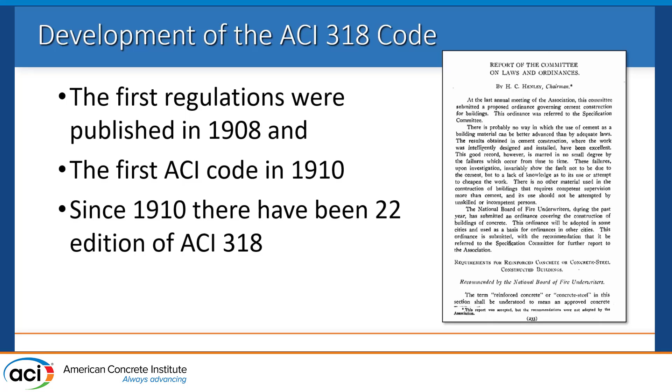It's been frequently revised. We revise the code through a consensus standard process, which is designed to guarantee that minority opinions are heard and considered, and that there's a general consensus. And as a result, I think it's really a very solid, up-to-date document. It continues to be, based on the number of revisions or additions that we've made. The code has updated in intervals anywhere from 3 to 6 years or so. Actually, I think there might be a longer period in there.

But this is all of the editions of the code from 1908 through 2014. And I know this is a little hard to read, so I'm going to read every line here, starting at the top. No, just kidding. These are all 22 editions, but the spacing in terms of intervals is not terribly regular. We see 2 years, then an interval of 10 years, 7 years, 6 years, 5, 6, and so forth. In the current edition, we went from 2014 to 2019, and the next edition will be 2025. So we're looking at a 6-year interval.

Some of this is driven, especially in the last couple of decades, by the overarching building code that references ACI 318, which is the International Building Code. And we had quite a bit of information this morning about codes in the U.S. and how they've developed. But the main point is the ACI 318 code is referenced by a sort of master building code, typically, which is the International Building Code, IBC.

ACI 318 is also referenced by a number of other important regulatory documents in the U.S., including ASCE 7, which is our loads document, ASCE 41, which is our document for seismic evaluation and rehabilitation of buildings, and a number of other documents. So it's a key part of the concrete design landscape in the United States.

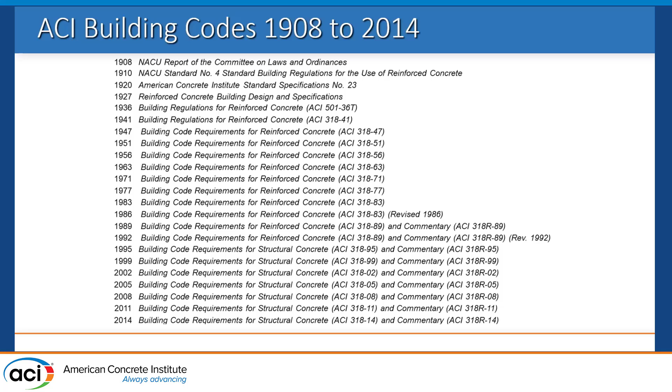So, moving along, what is the current version? I've mentioned it's 318-19, and there's a parenthetical 22 there after it, and the next edition will come out, we believe, in January. It will be published electronically, and then the printed edition will be available a month or two later. It has to go to the printers and get printed and bound and mailed back and everything. You might be wondering, what is that 22 that follows the 19? Does that mean that there was a different edition of the code in 2022?

Not really. In 2022, we made some minor updates to the code just to fix errata, so typographical errors, very small things. We also updated some of the reference standards, the ASTM standards, and other standards that are cited by 318. We brought those up to date, but we didn't make any technical changes. So if you have an edition of the 318-19 code, you can be comfortable in continuing to use it, whether it has that 22 after it or not. The 22 is just a slightly refined version, but the technical content hasn't changed.

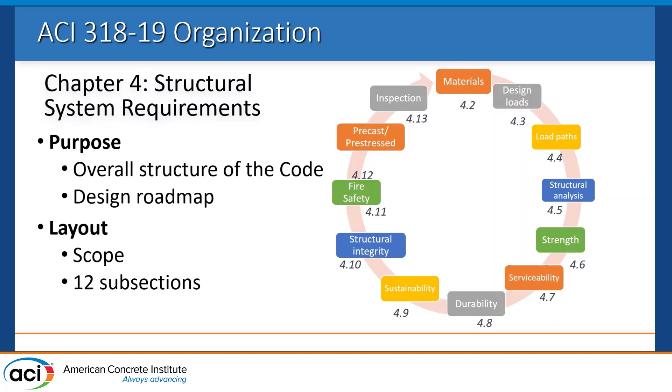For instance, at the top, general information on materials and where to go to find out about cementitious materials and reinforcement and so on, embeds, design loads, where do you go to find design loads, and so on. We get around to sustainability, we get to fire safety, precast, prestressed, and so on. All of those things are described in Chapter 4, and they tell you which other sections of the code you need to look at to comply with the requirements for those topics. So I recommend, if you haven't worked with ACI 318 or are wanting a refresher, that you just spend a little time looking at Chapter 4. It'll get you started in the right direction.

All right, so there are 27 chapters in ACI 318, and if we look at them, we can kind of group them into themes. One of them is general. That's like Chapter 1. It describes the applicability of the code, how you should interpret the code, and so on. It is very general stuff. Systems, that would include Chapter 4 that I just described, looks at overall organization and usage of the code. Members is a very important grouping of chapters. These are chapters that are devoted to design of a specific type of member.

So you will find member chapters such as beams, one-way slabs, two-way slabs. The reason for those chapters, and those are all new, the material in them isn't new, but we brought from 318-11, we reorganized and put everything into what's called a member-based code organization. That was the main thematic update to the code in 2014.

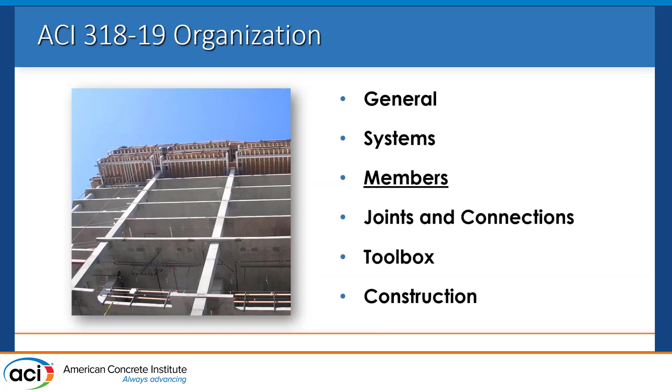All right, so I mentioned the member-based organization of the code, and I want to just briefly touch on that. Here are the member chapters. If you have a particular kind of member that you're designing, a beam or a column or a wall, these are the chapters you go to. So this was, I think, the genius of the reorganization in 318-14: to group everything in the way that the users of the code, engineers, approach design. So we have loads, detailing requirements, analysis requirements, and so on for each type of member in each chapter.

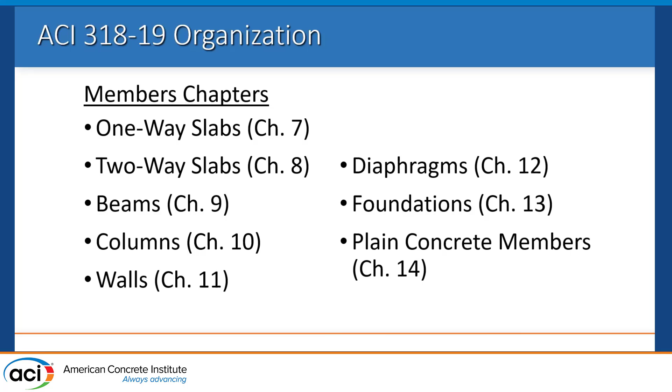So there are a total of 8 member chapters. This doesn't mean you can only design these kinds of members with ACI 318. You can apply the general principles of ACI 318 to designing other types of elements, but these are by far the most common. So let me illustrate why we went through all the work of reorganizing the code in 2014. This is an illustration that shows, for the 2011 edition of ACI 318, all of the provisions required to design this portion of this column. It's a column that intersects with a slab. There's a lap splice there, and there's confining reinforcement. This is a gravity column, obviously, because those ties are quite far apart, rather than a moment frame column.

But if we look at the numbers there, we see references to Chapter 7, Chapter 12, Chapter 11, Chapter 9, and Chapter 10. 5 different chapters and about 7 different areas to look in. So it's kind of a nightmare, really. People who do this day in and day out know, okay, I had to go there, there, and there. But for people new to it, or if you're trying to teach this in a university setting, it really was kind of a mess.

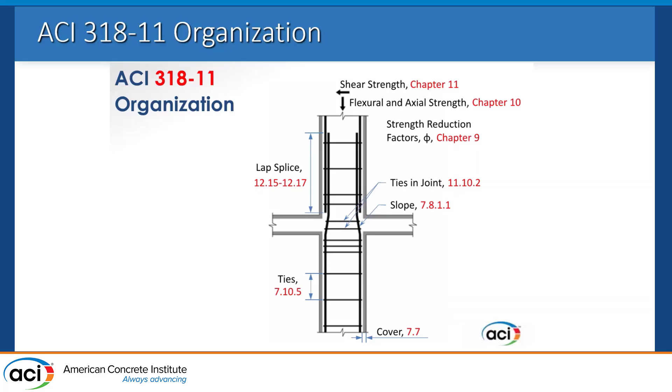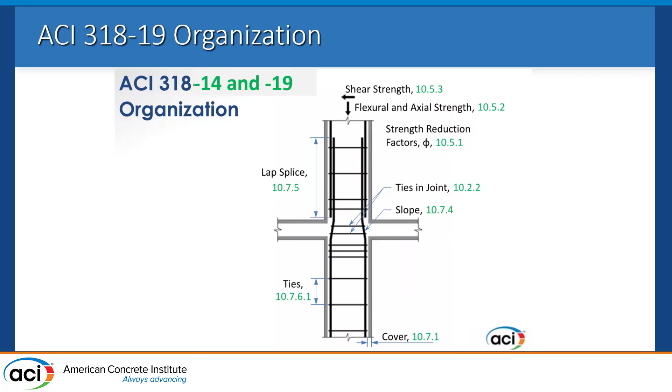So this is what we did. Chapter 10 is the columns chapter. And if you look at all the numbers here, I don't know if you can read them, that green's a little light. These are all subsections of Chapter 10. So when you're designing this column, you follow through Chapter 10 from beginning to end. And if you're satisfied that you have complied with all of those requirements, you have properly designed the column according to ACI 318. So this is what we did in 14 and 19, and this same principle carries through into 25.

All right. One other group of chapters that's very important to the organization of the code is the so-called Toolbox chapters. I'm not going to talk about all of these groupings of subjects because we have an all-day seminar for that if we wanted to spend that much time. I'm just touching on the most important underlying philosophy here. So we have these Toolbox chapters, and that's kind of an interesting designation.

And actually, this is a tool bag, not a toolbox, but we won't get hung up on that. The toolbox chapters, as the name implies, are provisions that you want to consult often as a designer when you're designing multiple kinds of members. For example, Chapter 21 contains all the strength reduction factors. Those are the phi factors for load and resistance factor design.

The phi factors are all in Chapter 21, except for a few having to do with some specialty items. But by and large, they're all in Chapter 21. So if you were designing a beam, you would go find your phi factor in Chapter 21. A slab, you go find your phi factor in Chapter 21. A footing, go look for your phi factors there.

The idea is that if you're designing a member or an element, you go out to that toolbox chapter, rummage around in it, find what you need, and then you come right back to where you were in the members chapter. The same goes for the toolbox chapter called sectional strength, a really fundamental key chapter because it's in that chapter where you're told how to calculate the nominal flexural strength, shear strength, torsional strength, and a couple other things that you can rely on for a member.

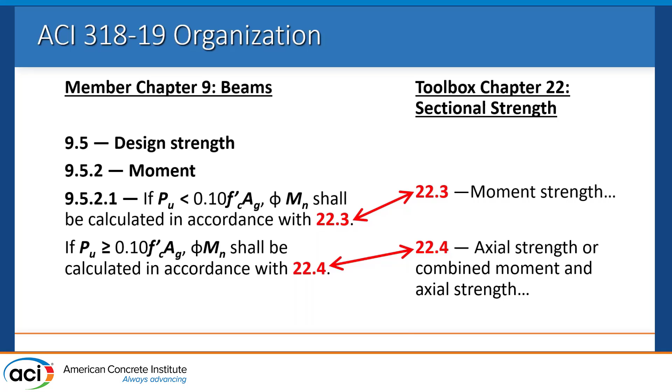Okay, and all of the member chapters have essentially the same organization. That is, this is an example for Chapter 9 beams, but these subsections 9.1 through 9.7 are the same pattern that is followed for every member chapter. So in Chapter 10 on columns, you'll see 10.1 through 10.7, and those topics are addressed in each one. So we're trying to clarify and make more predictable and more understandable the process of designing each type of member.

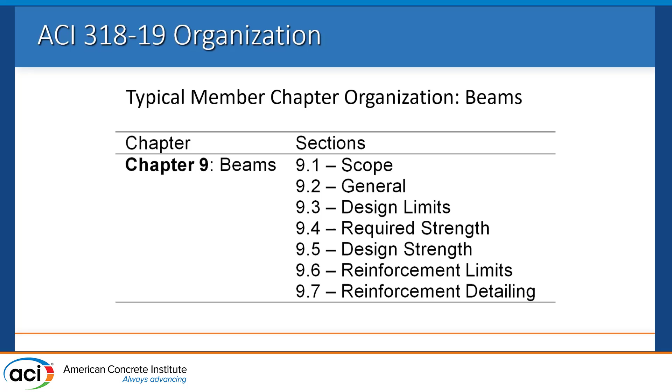Okay, so everything up to this point, I've just been explaining what the 318 code currently is, how we got there, and the underlying philosophy of how it's organized and laid out. Next, part B, is actually just one slide. I'm going to explain where we are with the 2025 edition, at least in terms of the timeline of development and so on, just so you can understand where we are in the process currently.

So very soon after publication of the 2019 code, which was earlier in 2019, we formed the committee for the 2025 edition. I was appointed chair by the Technical Activities Committee of ACI, and then I appointed all of the members of ACI 318. There are, I think, 51 or 52 voting members of the 318 main committee, and then there are 15 subcommittees. And there are some members of 318 who are members only of subcommittees, but not the main committee. And if you count up all the people on the main committee and the subcommittee members, there's about 150 people involved. So it's a big group.

Of course, all 150 of us always agree on everything, so it's very easy to work with 150 engineers.

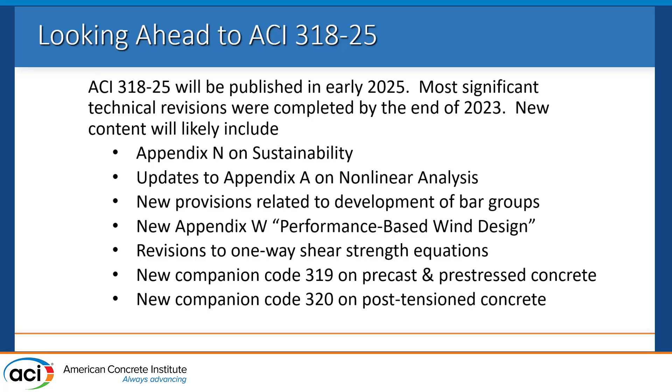as opposed to performance-based seismic design. We'll have significant revisions to the one-way shear strength provisions, and there will be a new companion code, ACI 319, on precast and prestressed concrete, and another companion code, 320, on post-tensioned concrete. Those codes are under completely separate development from ACI 318, organizationally, in that they have the same standing as design codes as 318. However, there's a tremendous amount of coordination and cross-membership between 318, 319, and 320. So those are the main things that are coming, and I just want to briefly talk about each of them.

I don't need to hammer home this point, but we are in a climate crisis, and concrete is getting blamed for a lot of the atmospheric carbon that's produced every year. It is true that somewhere between 6 and 8% of atmospheric carbon is produced related to cement and concrete production. In the U.S., it's actually a much lower percentage, but worldwide it's 6 to 8%. Another statistic I found very interesting is since 1950, so that's 74 years ago, the amount of Portland cement produced in the world has grown by 30 times.

And even since 1990, the amount of cement produced worldwide has grown by 4 times. So we are making a lot more cement than we were 75 years ago, like a lot more. And it's worthy of our attention as structural engineers to figure out what we can do to bring carbon emissions down in our field. We can do our part, and I'll explain a little bit more.

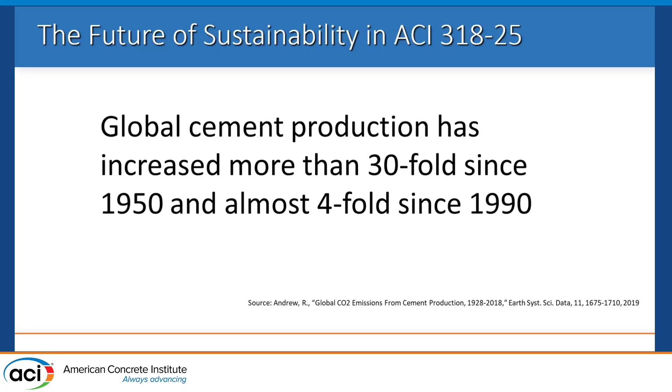This is why in ACI 318-25 we'll have a new optional appendix, Appendix N. It'll probably be called Appendix C or something like that, but for now it's called Appendix N. And the only thing that Appendix N does, I just want to emphasize this, Appendix N does not set limits on global warming potential or life cycle analysis of concrete projects. It only describes how global warming potential and life cycle analysis shall be performed for concrete structures.

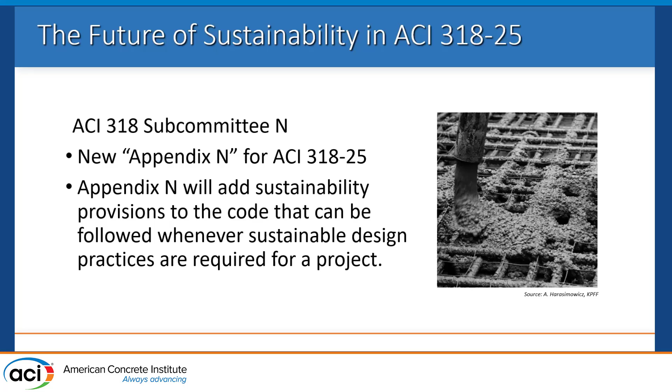And what's the reason for that? We want everybody doing it the same way. If we're going to be comparing projects, comparing materials, it's up to us, ACI, to lay out a level playing field for everyone. Otherwise, if we don't do that, some other entity, organization, government or private, nonprofit or for-profit, is going to describe that, and it won't be very uniform or objective, in my opinion. So we're not setting carbon limits, we're just saying how they should be evaluated.

So Appendix N is actually fairly short. It has a scope section. Then we talk about mixture sustainability measurement metrics. That is basically the global warming potential of a particular mixture. System sustainability measurements, those would be generally sort of life cycle analysis evaluations and how they should be done.

And then resiliency. So resiliency depends on who you ask, but I think most people are of the opinion that resiliency is a part of sustainability, because if you have a more resilient structure, then that structure will need to be replaced less often, and it's also more resilient to disasters or long-term deterioration. So resiliency contributes to a more sustainable built environment.

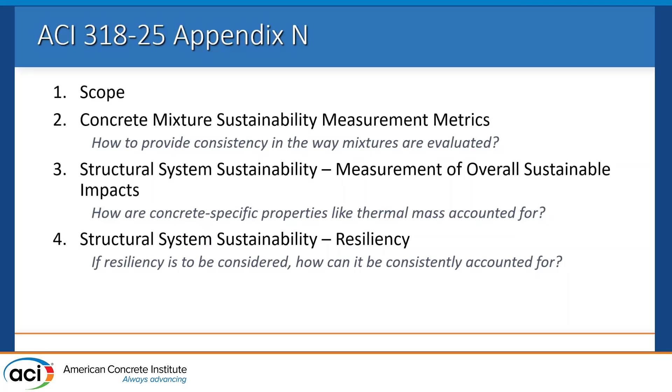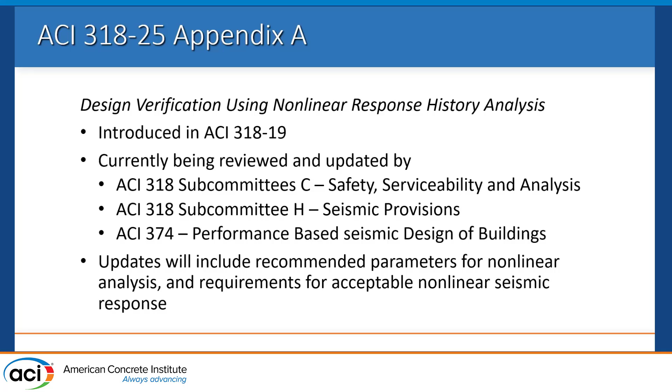So that's Appendix N. Appendix A, as I mentioned, was introduced in 318-19. It's currently being worked on by Subcommittee C, which deals with analysis, safety, serviceability, and analysis, Subcommittee H, which deals with seismic provisions, and then also ACI Technical Committee 374, performance-based seismic design of buildings, is assisting Subcommittee C and H with revising and updating this appendix. And this will provide a little more guidance than we have in the past for evaluation parameters for nonlinear analysis.

A new subcommittee was formed, Sub-R, looking at the relationship between the development, that is the pull-out strength or breakout strength, of a group of bars compared to the development, again, breakout or pull-out of a group of anchors. So we have different provisions in the code for development of reinforcing and for the strength or the development of concrete anchors. And those two things, there's no obvious bridge between those. So this committee has undertaken a look at how those should relate and what's rational.

And it's very useful. They've done some very interesting things with reliability of pull-out and breakout of both anchors and reinforcing bars. So there'll be a few updates to Chapter 17 related to the work of that committee.

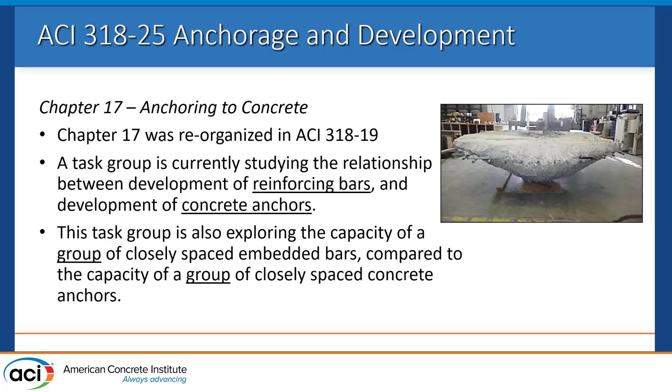Regarding wind, a fairly recent development has been the publication of a pre-standard for performance-based wind design by the American Society of Civil Engineers. I think many of us who work with seismic design are familiar with performance-based seismic design. ASCE is obviously headed towards publishing a formal standard on performance-based wind design. And again, we, ACI, want to make sure that we are filling the need to explain how to do performance-based wind design with concrete structures. If we don't, somebody else will, and we really should be the authority on that.

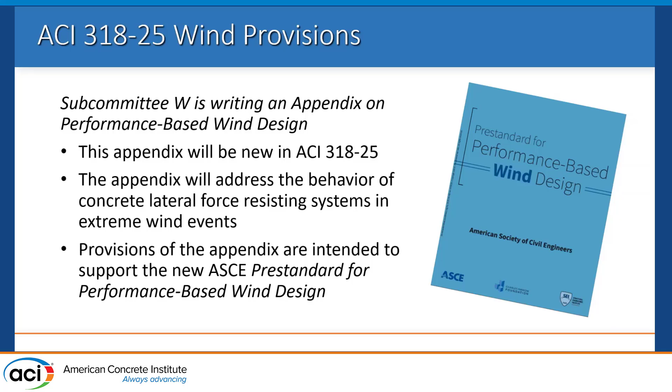So this is in development. I think it's very close to being done, and you'll see that as an appendix. Performance-based wind design generally applies only, currently anyway, to high-rise structures with concrete shear wall cores. But it's a very real thing, and it can save quite a lot of money, particularly in high wind, high seismic areas of the country.

I mentioned that the one-way shear provisions are also changing. What happened was that in 318-19 we made quite a significant revision to the one-way shear capacity equations. There were, I don't know, 9 or 10 different equations in the code for calculating one-way shear capacity. We tried to unify all that. That was largely successful, except we found, and this wasn't until after 318-19 had been published, that for certain classes of members, those unified design provisions resulted in really very unreasonable designs.

And those classes of members included tall cantilever retaining walls, not shear walls. So cantilever retaining walls over about 25 or 30 feet tall. Those aren't terribly common, but they do exist. And those particular shear provisions were resulting in very thick stems at the base of the cantilever walls, and even requirements for shear reinforcement in those areas, which doesn't make sense because there are many very tall cantilever retaining walls, especially in public works projects, that are doing just fine under the old provisions. So we've been looking at that.

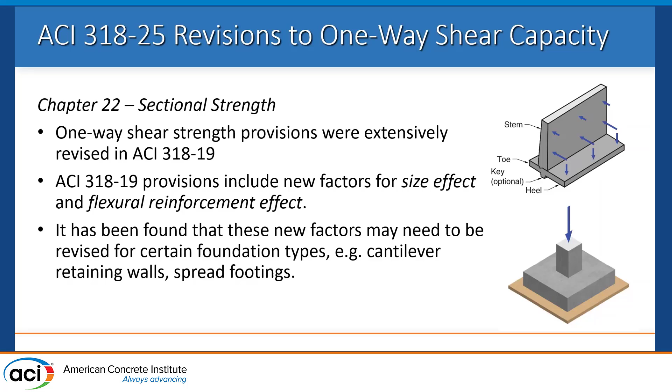And the point made, and I thought it was a good point, is where are the failures in shear of spread footings that prompt this need to make them thicker? So we've revisited that. So we're going to adjust those things in the 2025 code.

And last two slides on revisions in 25. I mentioned the formation of two new code committees, ACI 319 and ACI 320: the precast structural concrete code and post-tensioned structural code. Both of those are in development or very near being finalized. The reason I mention them here is that we still retain in ACI 318 the precast and post-tension design provisions necessary for an engineer to design probably 80+% of those types of structures. We aren't shipping all those things out to another code.

However, there are things that designers really need to have available, tools and methods that need to be codified to design certain kinds and certain aspects of precast, pre-stressed, and post-tension structures. So those are going into these new codes. The new codes follow the exact chapter and section structure of 318, so it will be very obvious what the linkage is between the two.

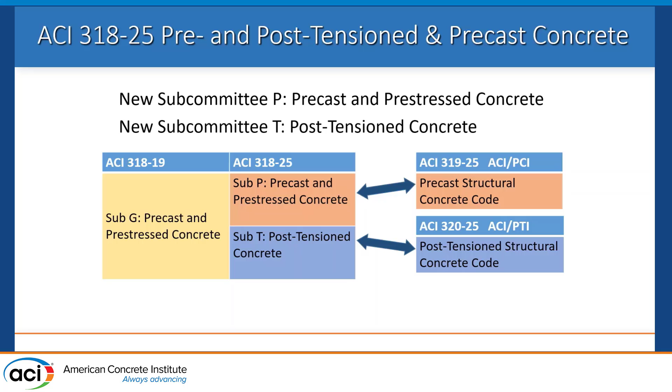And finally, deep foundations, especially seismic design of deep foundations, has been problematic for a number of years because there are deep foundation provisions in ASCE 7, our loads code, the International Building Code, and in ACI 318. Those provisions sometimes overlap, sometimes there's gaps, sometimes they're contradictory. So the landscape for designing deep foundations has been really a mess. These deep foundation elements would be piles, piers, auger cast piers and piles. They have a lot of different design provisions floating around out there.

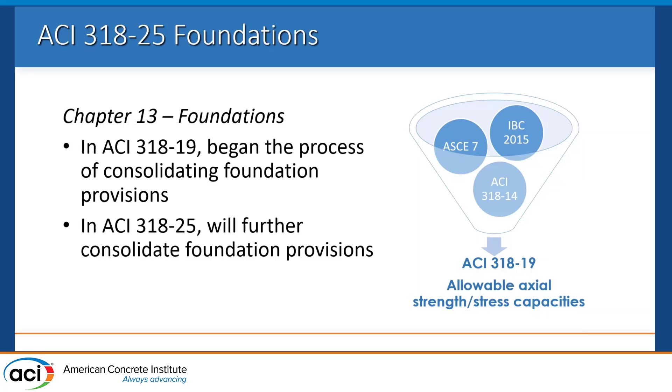We thought, starting actually with the NEHRP provisions development process, that we would try to unify all this in one set of regulations. And we've attempted in ACI 318-19 to bring all of those together, the ASCE, IBC, and ACI provisions, into one place, which is ACI 318. We weren't quite successful at completing that process in 2019, and we have been trying for 2025 to complete that process with the idea that these other two codes can leave the concrete design provisions for deep foundations to ACI rather than publishing their own, which together are incomplete, contradictory, and there are gaps sometimes. So we're working on that. I think that is about it.

Anyway, without showing that slide because of the audio, 318 Plus is this platform that I mentioned. It's a really useful tool. Like I said, I like paper codes, but I also love to look for keywords. For instance, I'll type in confinement and find all the places in the code where the word confinement is mentioned. And it's amazing what you find when you look for keywords like that, or phrases, or whatever. You can find that particular topic in areas that you never realized were there. So it's a very useful way to explore and use the code.